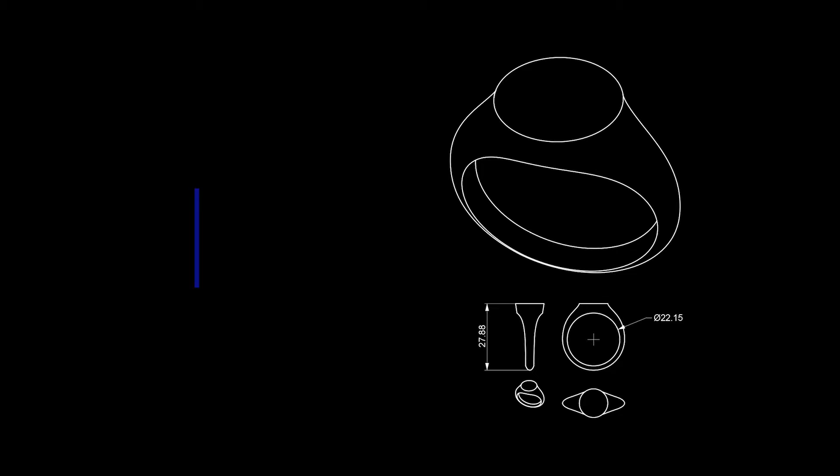Okay guys, I'm going to show you how to do the next task, which is to make some dimension drawings from your signet ring. So we just finished making a ring, and now you want to make some scaled orthographic drawings - a plan, elevation, and side view, those kinds of things.

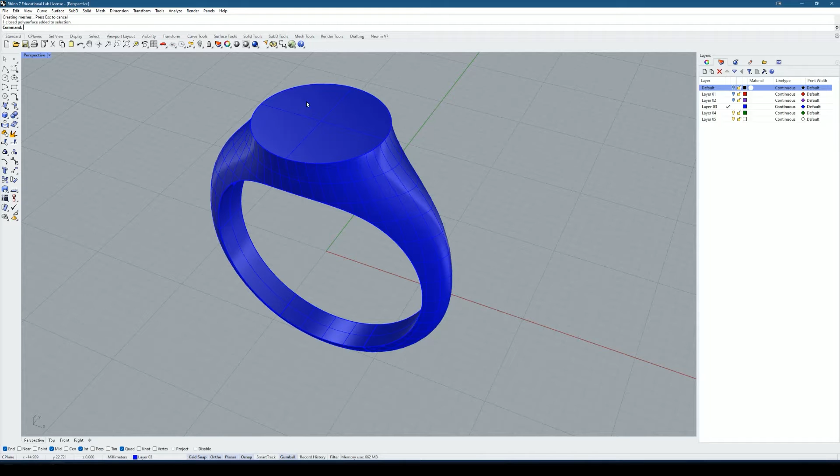In your perspective view, set up a view that you would like of your object - a nice camera angle, maybe looking down on it from above. You can zoom yourself in and out, and then don't worry about the orthographic views. The top, front, and side view will be drawn as is.

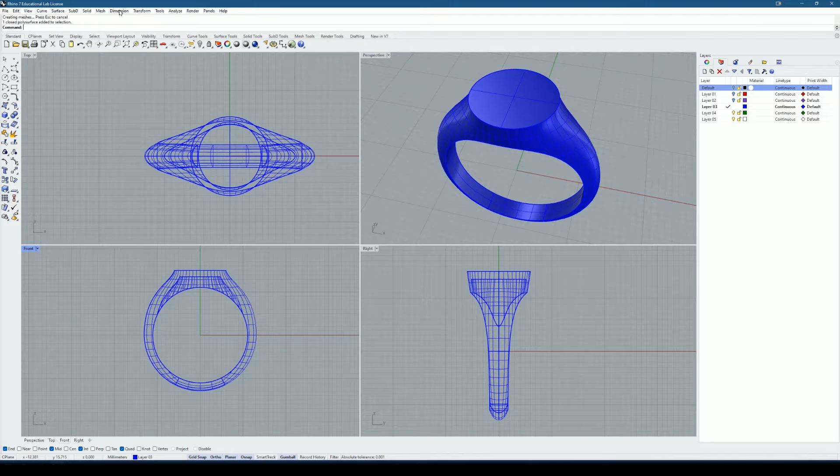Go up to the dimension tool, down to make 2D drawing. It's going to ask you to select the object that you want to make. You can pre-select this before you go into the command, and then it will skip that step.

Right click, and the options that we're looking for is first angle projection, which is the more standard one for Europe. If you're in America, you might see third angle projection. So we're going to go with first angle.

We're going to have the object properties by the output layers, so that it doesn't keep our drawing blue because it's come from a layer that has been colored blue, and it will inherit whatever color the layer it's on. The other option that we want is these tangential edges, these tangent edges.

Because our shape has these really curved forms to it, it's compound curves going in two different directions, we want Rhino to draw what that looks like, almost like a silhouette from the shape in our perspective view. In this case, we don't want to see all of the hidden lines, so we don't want to see all of the internal structure. We just want to draw it as is.

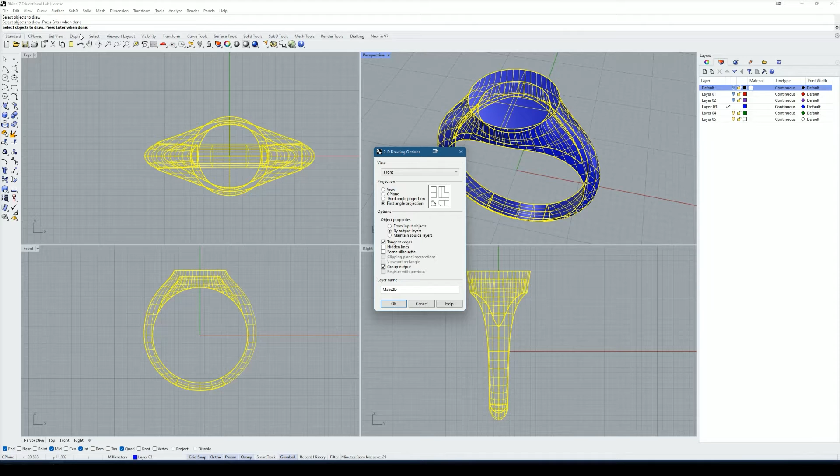And yes, we would like it to make them as a group. So when I click OK, you'll see in the command line up here, it's going to flick through between drawing each of these different viewports. Choose OK, and then you can see here, it's drawing each of those.

And then when it's done, you'll see from the top view, all of your objects drawn. And then we'll just move this over to one side.

Now, Rhino makes these as individual groups, which is really handy, so you can align these up and move them around much easier. In previous versions of Rhino, it would have made all 4 drawings as one group together.

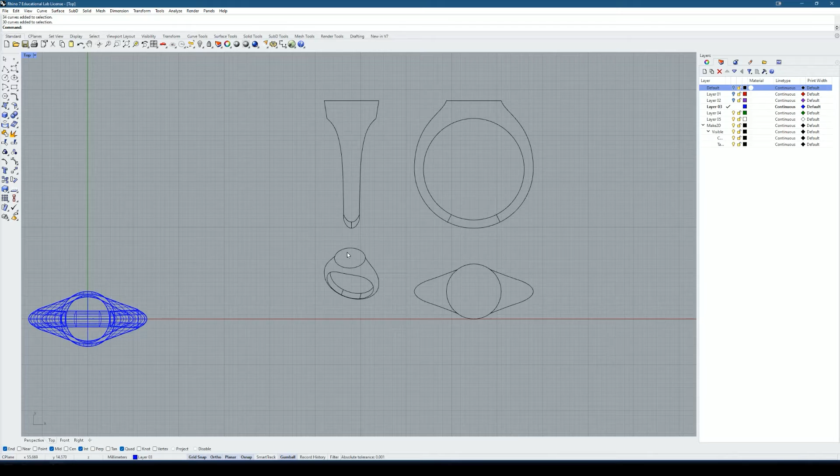So it's really nice. You need to tidy up your drawings a little bit, so it knows where the edges of those surfaces were. So we have to fix that.

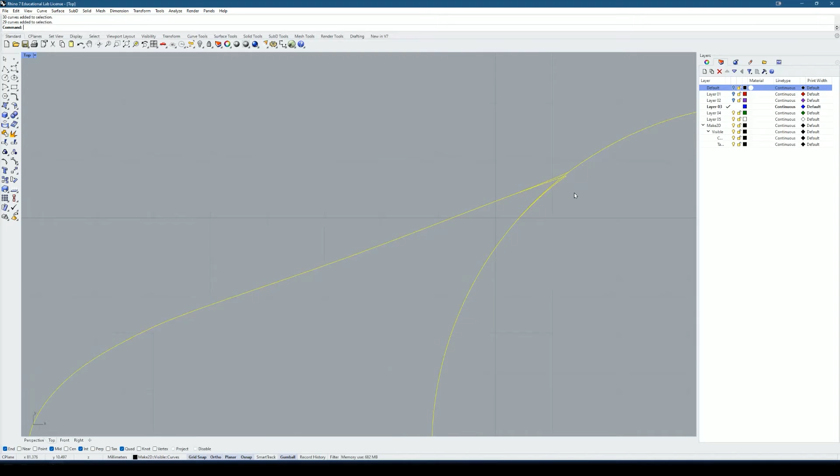And then maybe in places like here where those tangent edges are really close to each other, or this little piece here, Rhino is having a little bit of trouble distinguishing those. So a tiny little bit of tidy up.

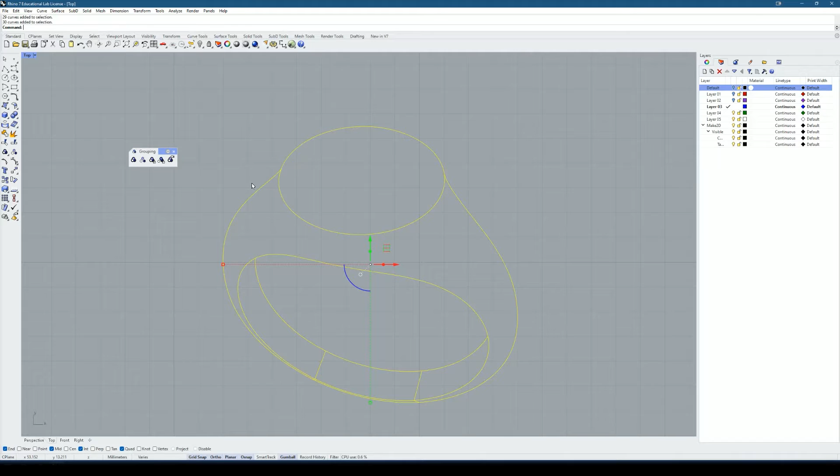Under the group menu, so over on your command bar on the left hand side, if I left click and hold down on this, you can see you have group and ungroup. The shortcuts are Control G to group and Control Shift G to ungroup if you're on a Windows PC, or Command G or Command Shift G if you're on a Mac.

So just going to ungroup that, and then go in here and select each of these little pieces of line. You can left click and drag. So as you know, when you drag a selection box, if you drag it left to right, only things that are fully inside of that object get selected.

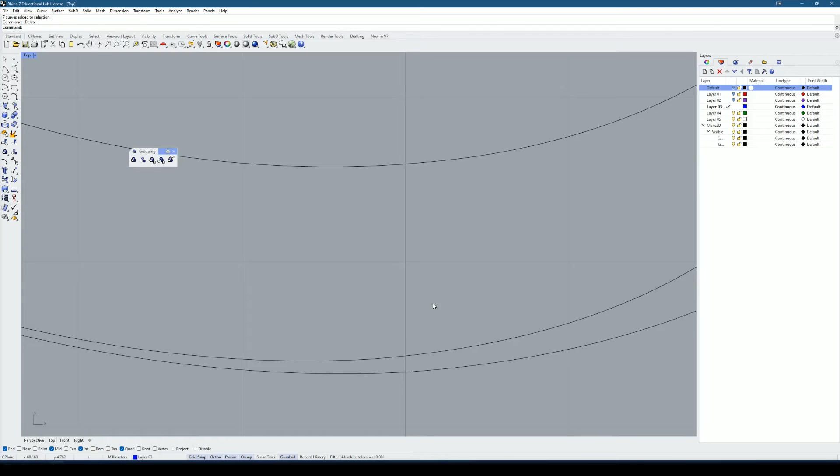So you have to zoom yourself in and make sure you're not taking away anything that you don't want to. If you see a gap, just draw yourself a little straight line to finish this.

And another thing, might as well mention it here - you can probably see it, this one's blue and this one's black. That is because Rhino has made these really nice sorted layers for what it is you've done.

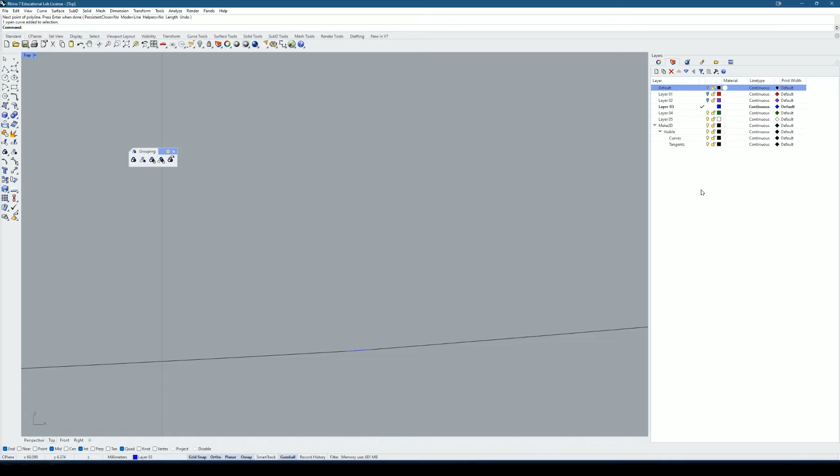So you can see it's made this Make2D drawing layer, and then because we only wanted to draw what was visible, we have a visible sublayer and then tangents and curves sublayers below those. We'll tidy those up in a few moments and get rid of the bits that we don't want.

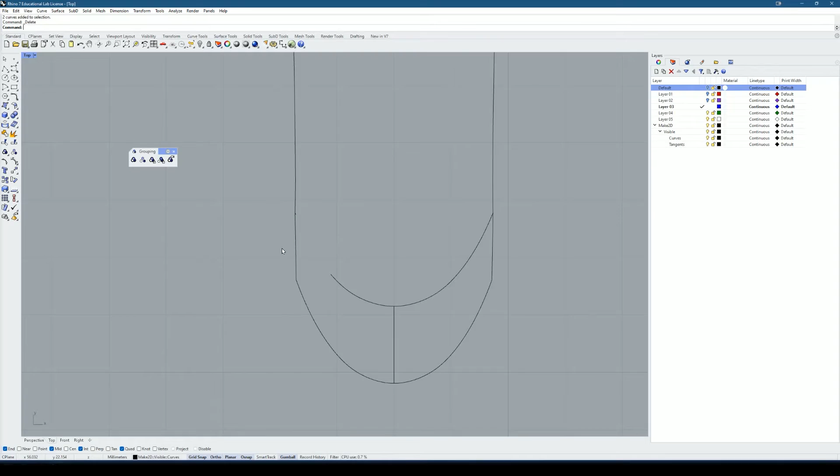So we're done with that. And then over onto the next one, Control Shift G again to ungroup. Go in and select all of the pieces that you don't want. You could use your Shift key to add to this selection, or you can left click and drag over it.

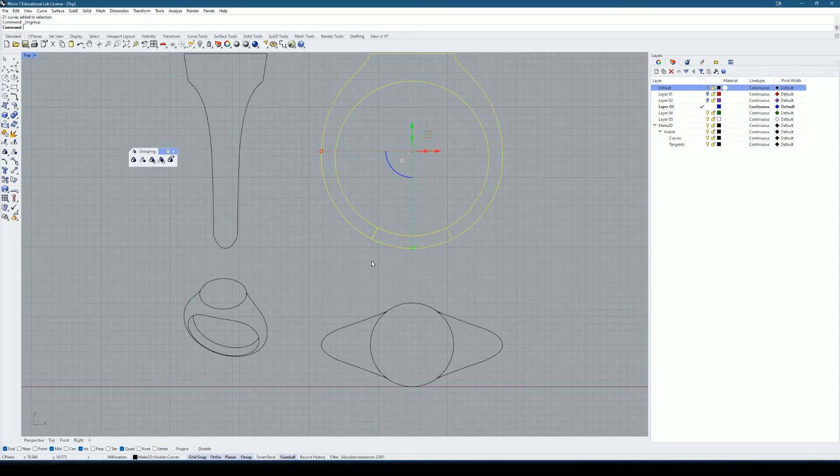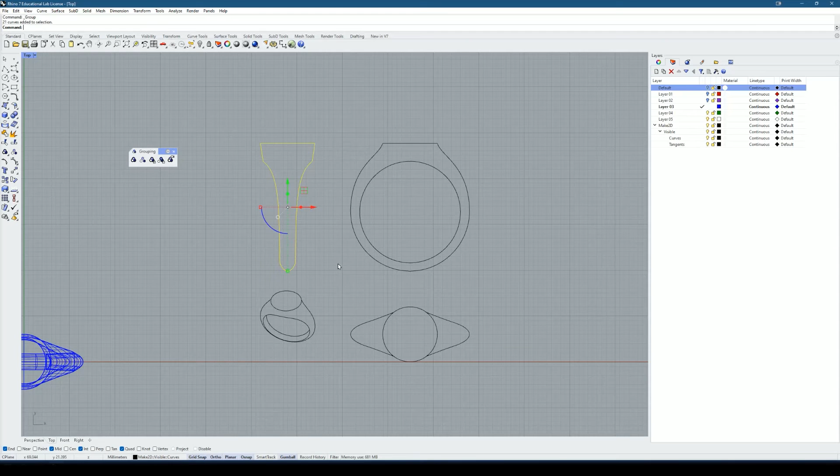Next one, Control Shift G, delete these lines - left click and drag over it. Have a look up here just in case there's any other pieces. Group this one back together with Control G. Group this one back together as well, and ungroup this one, so ungroup or Control Shift G. Then go in here and delete each of these little pieces or fragments that are causing the problems.

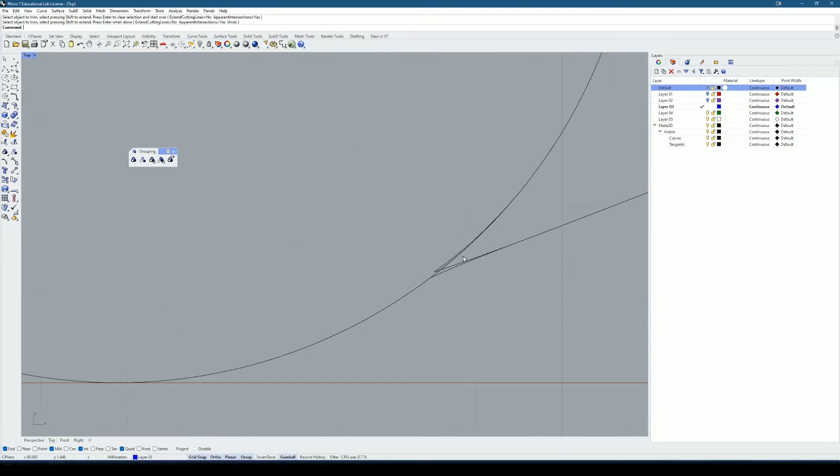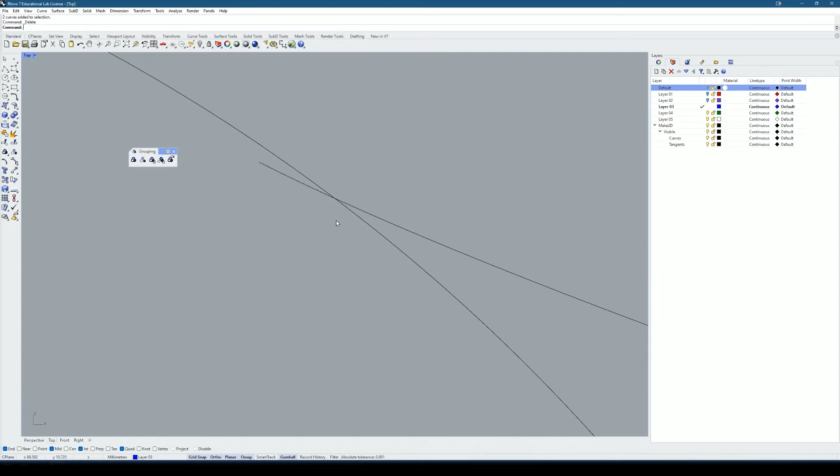Go over here to see if there's another one. Sometimes they make them in strange symmetries - some out to the left there, some these. Good here, you can see it's out here and here.

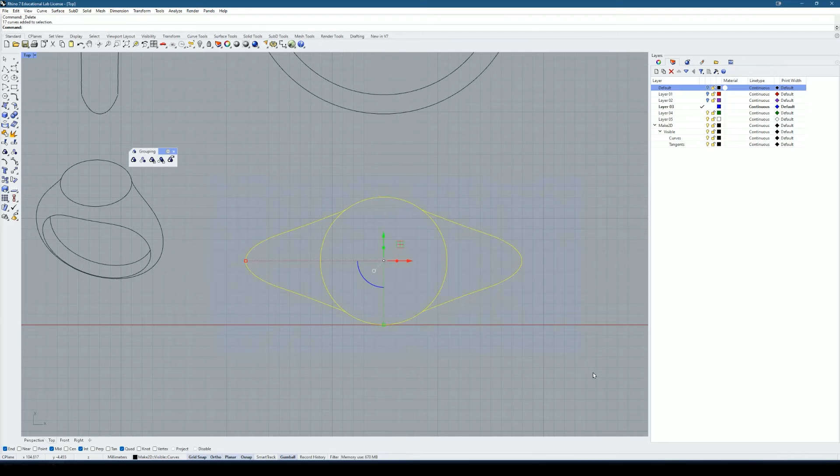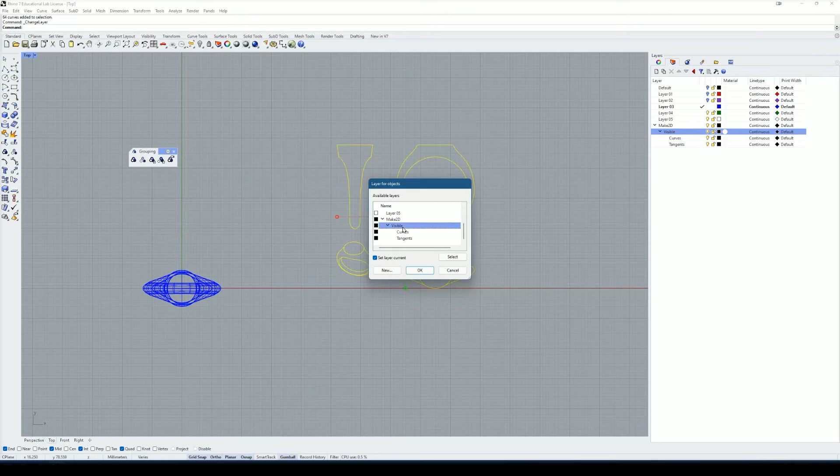Select all of that, make that into a group. Then to tidy this up a little bit, let's take all of this and move this onto one of these layers - this one called visible. So using the layer cake, change object layer and bring this onto one called visible, and we won't set that as a new layer, just leave this as is. That means that we can now bin these two sublayers, and you shouldn't have any warning that anything is on those because they should be empty now.

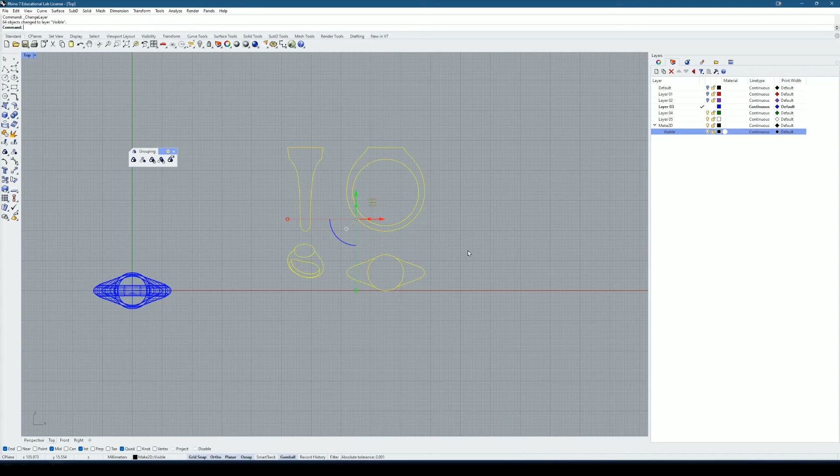If they are, or you do get a warning, it means that you may have missed some little piece for these, in which case go onto each layer, turn off all of the others and use Control A to select everything, and then while you have the gumball on, it'll highlight where that object is, and there might be some microscopic little fragments or a piece like that.

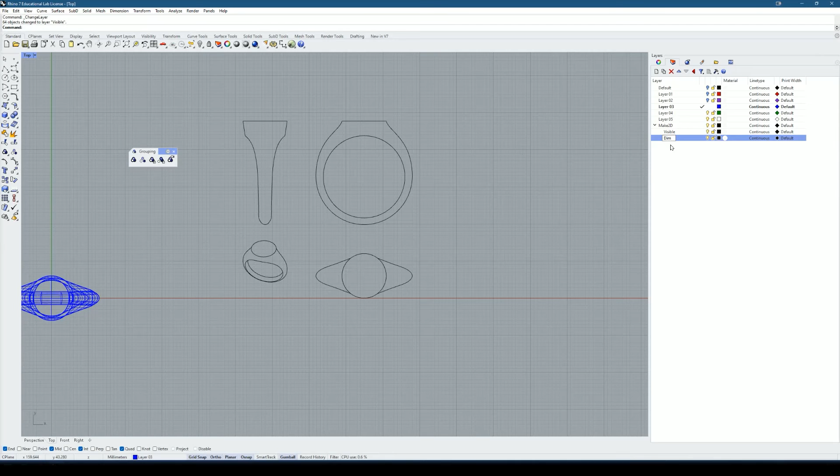We're going to add in one layer below this. We're just going to call this one dims or dimensions, and you might want to add in just a couple of small dimensions for this - so maybe the size for the ring size, and then one or two dimensions for these, so up to dimension, and then we'll make this a diameter.

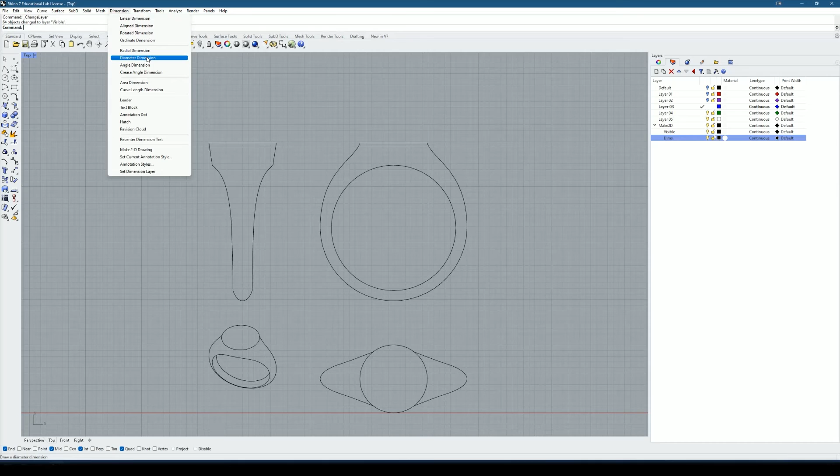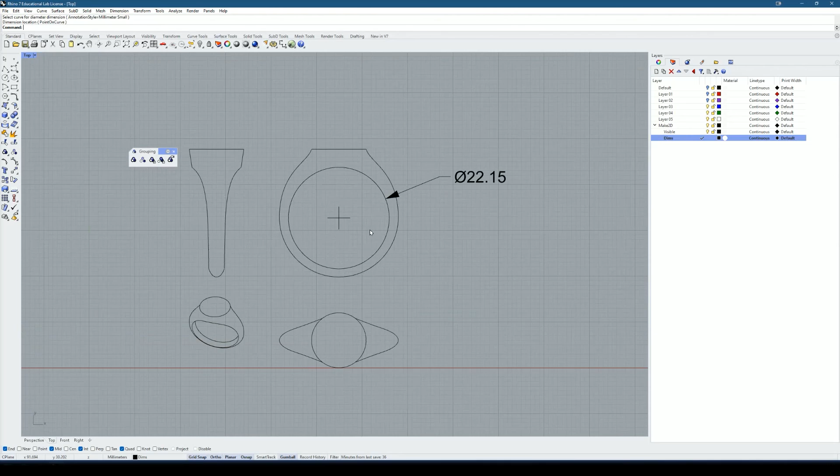Grab the section here, and you can see we're on the blue layer. I'm just going to go down and make the check mark for the dimensions there, so we don't have to move this again, and just drop a dimension over to one side - so 22 mil away. This is a small object, so you want to have a little bit of space with your dimensions around it. And then maybe a linear dimension between the highest and the lowest point.

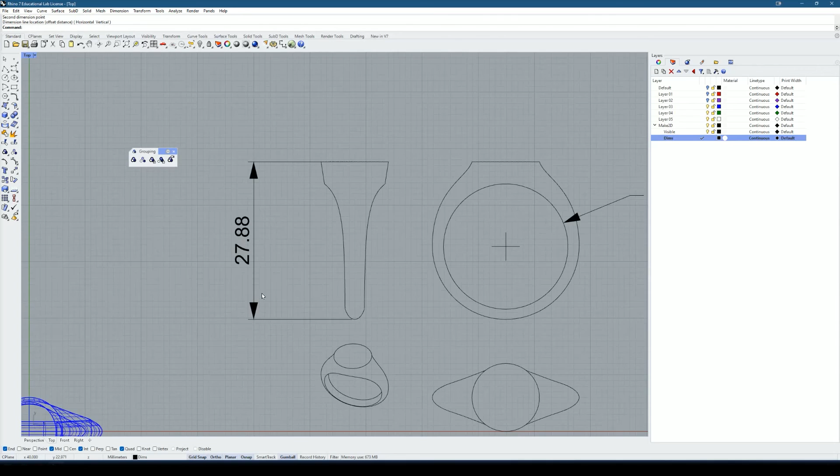So you just zoom in here and find that quadrant, and then you can bring that out to one side. You can modify these dimensions and the dimension styles for those - you go up to dimension and then go for your annotation styles. I'm not going to cover that in this video, that's a little bit more involved with the technicalities of making dimensions, not with the doing it in Rhino.

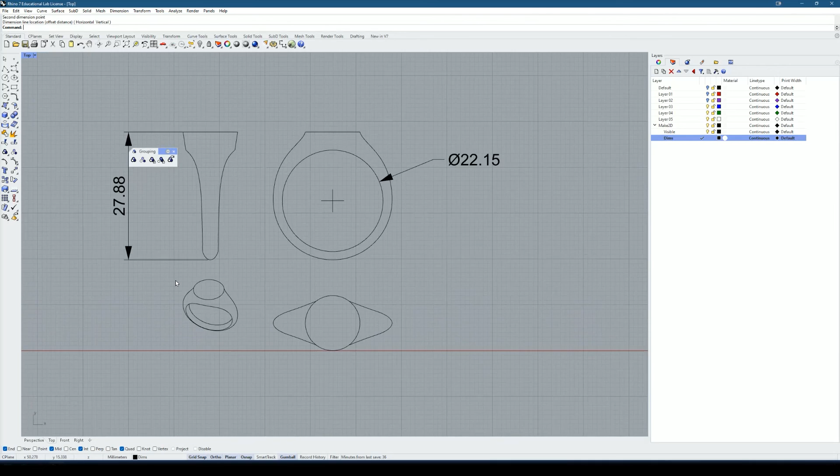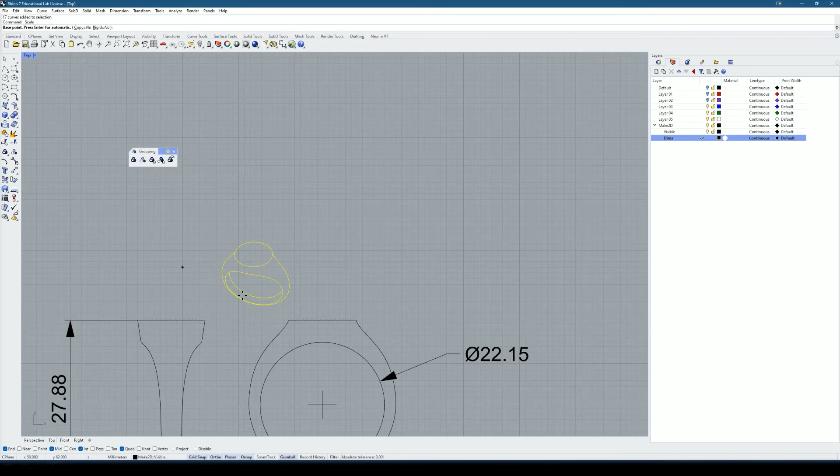Something else you might want to do is to take a copy of your perspective view. Again, hold down the Alt or Option key when you grab and move an object using the gumball - this will allow you to make a copy, and then once you've made your copy, you can scale this up. So we could use the scale tool, just grab it somewhere here, and this would be where you might make a nice colored in or shaded drawing inside of Illustrator with this. And if you're interested, let me know and I can show you how to do that.

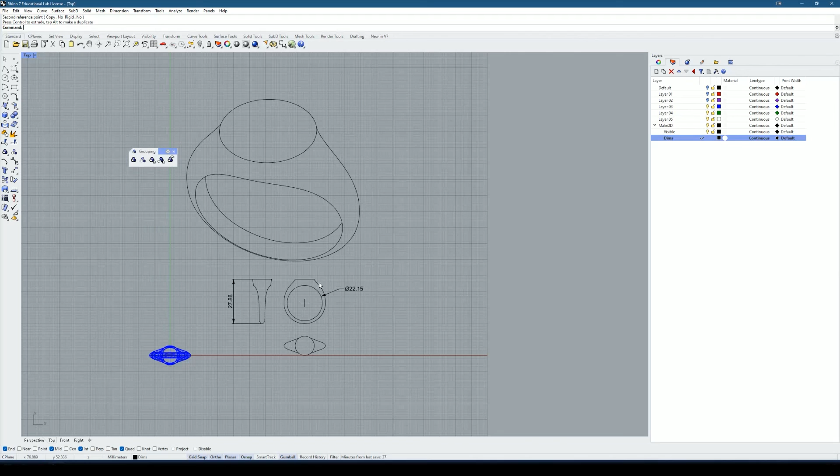After you've made these, you want to take them out of Rhino - you want to bring these into another program. So just grab all of these, File, and then export selected, and then you would export that as an Adobe Illustrator document. So file, export selected.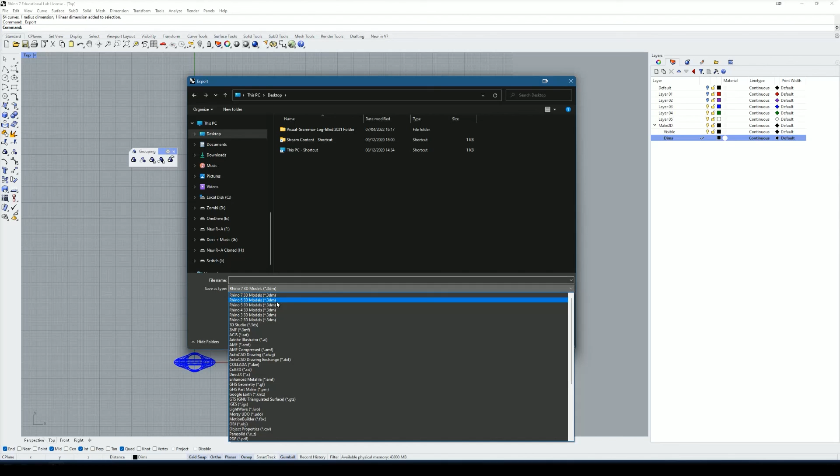And it's going to ask you where you want to pop it. In my case, I'm just going to pop it onto my desktop, and I'll swap it from being a Rhino file in the drop-down menu and swap it over to Adobe Illustrator file and call it something like Signet Ring 2D drawings. Choose save.

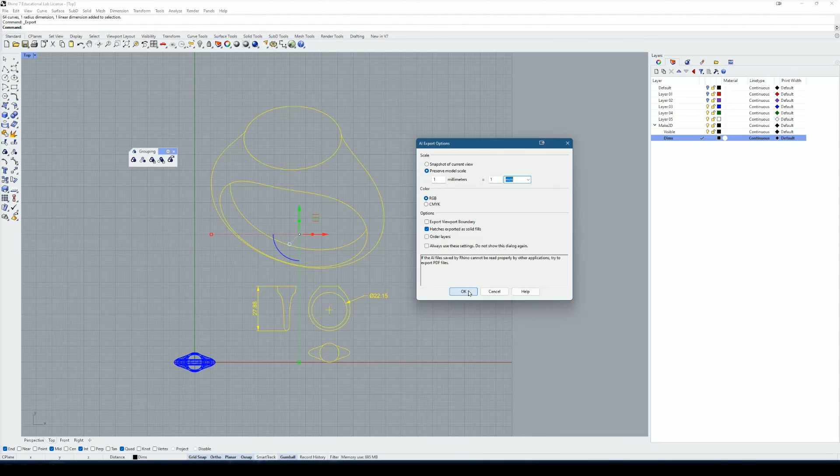And now it's going to ask me a couple of really important options. So do I want it as I'm looking at it on my screen? No, I want to preserve the scale of my model, so 1 millimeter equals - it's a big trick question - 1 millimeter. And your color mode, if you're bringing this into Illustrator for coloring, you could go for CMYK. If you're bringing it into Photoshop for coloring, you probably want to leave it as RGB. I'll just leave it set as RGB and choose OK, and that will save me one Adobe Illustrator file on my desktop that I can then import and tidy up and manipulate and do whatever I need to.